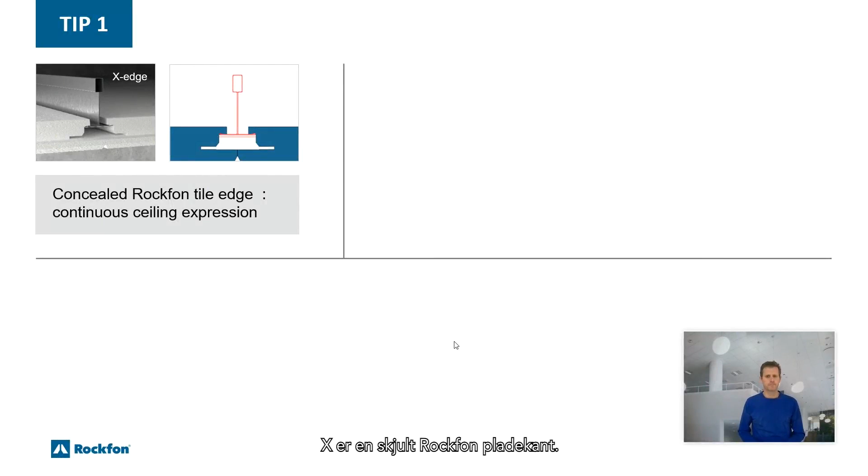Tip number 1. Let's start with what X-edge is and what its benefits are. X-edge is a concealed Rockfon tile edge. With this edge, you can make a concealed grid ceiling with an elegant and continuous ceiling expression.

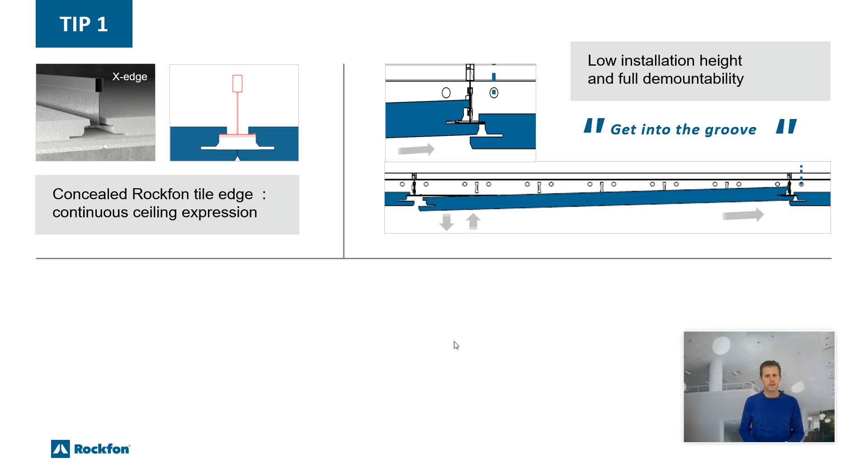To install or demount the tile, you just get into the groove on one side. On the other side, you have space to take the tile in or out. In this way, you install only from below the grid, and you benefit from a low installation height and full demountability.

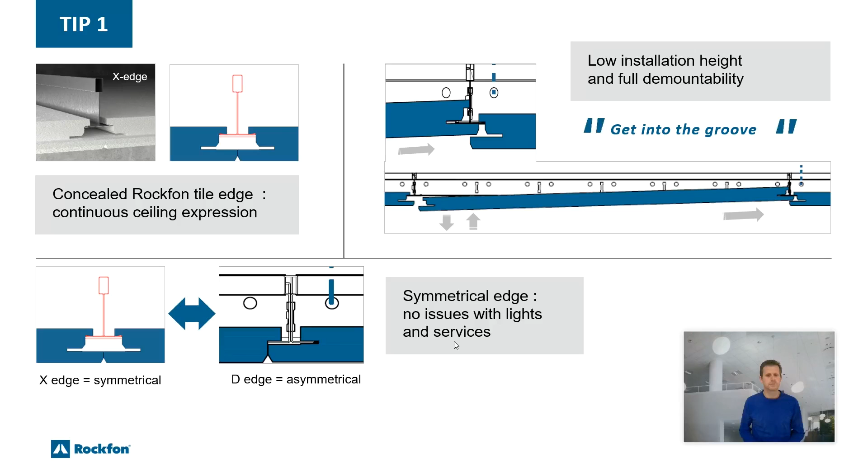Another important benefit is that X-edge is symmetrical, unlike the asymmetric concealed shiplap edges, for example D-edge. This means that the integration of modular lights and services is much easier.

Tip number 2. Choose your installation system, single or double layer. Consider the following points to help you decide if you need to use a single or double layer system. 2 systems are possible: the T24X single layer system and the T24X DLC double layer system.

The single layer system has a standard modular grid layout in one layer. It's easy and fast to install for small to medium tile dimensions, and a very low installation height of only 67 mm is possible. Also, the integration of services is easy.

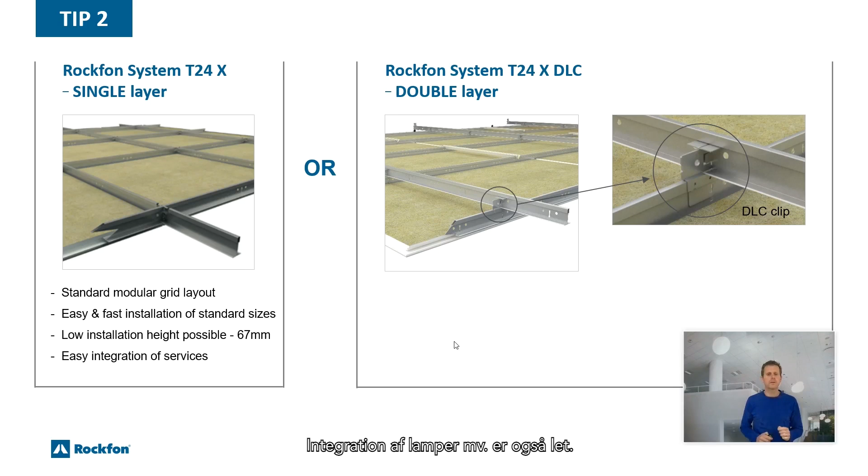In the double layer system, there are 2 layers of parallel T-profiles that are connected with the DLC clip. Because you can slide the tiles, installation is very easy for large tiles and the perimeter tiles. Brick patterns are possible. And depending on the allowed ceiling deflection, you can save up to 33% suspension points.

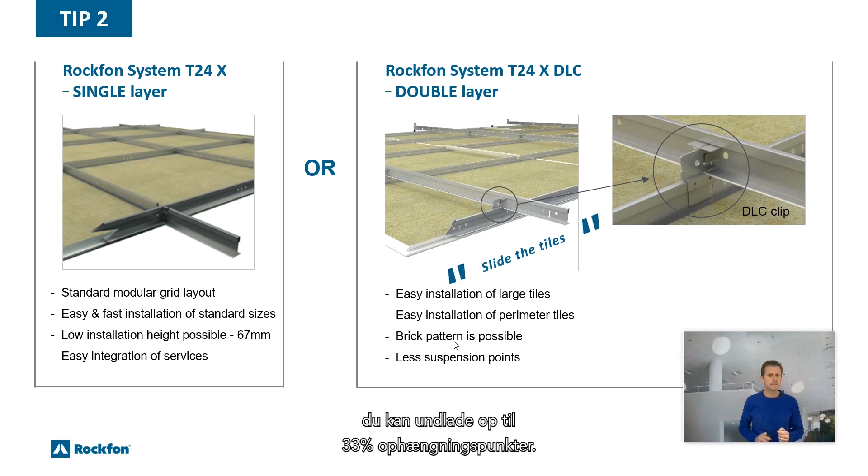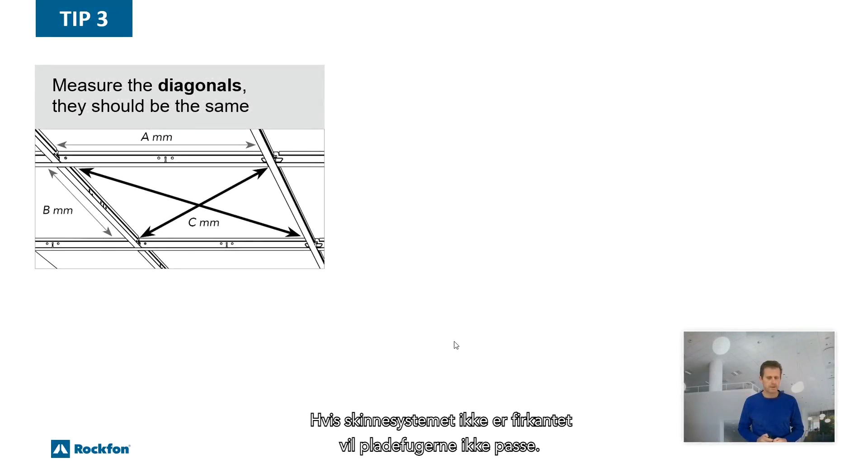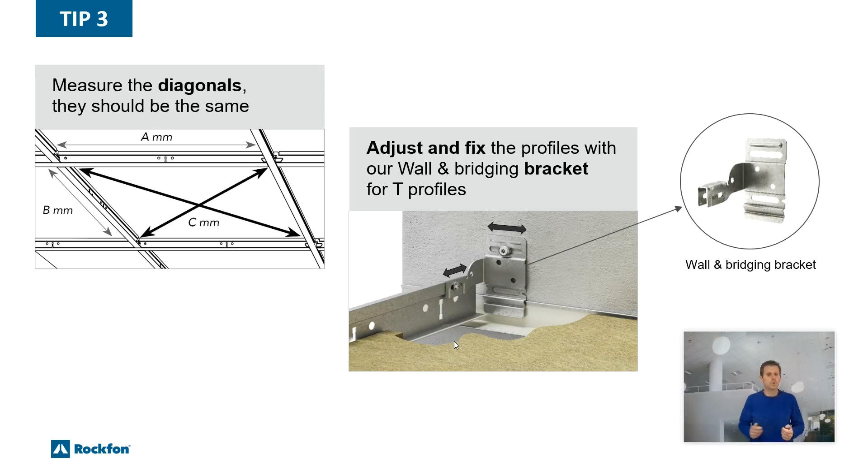Tip 3. Simple but very important. You're not there if it ain't fixed and square. If the grid is not square, the ceiling joints will not be aligned. The grid is square if the diagonals are the same. To make sure that the grid stays square, fix it to the wall. You can do this quickly and easily with a Rockfon wall and bridging bracket.

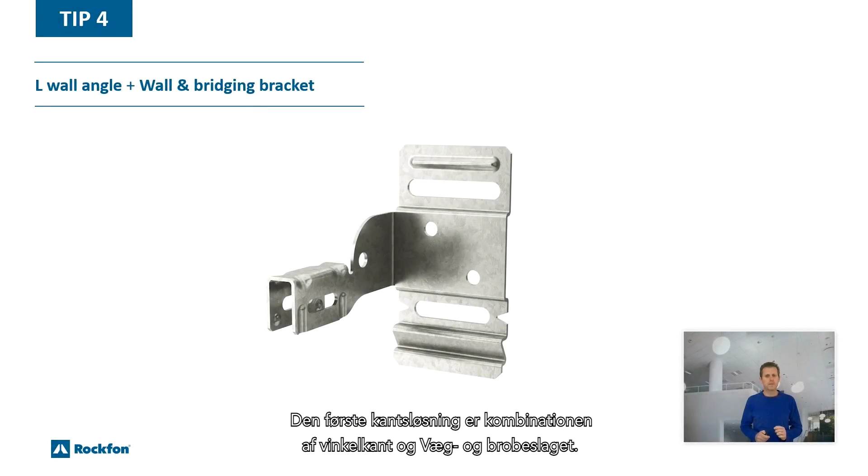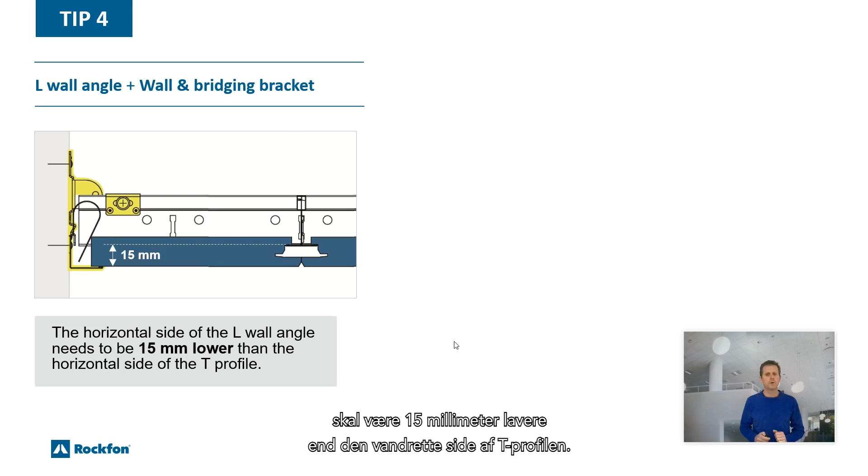Tip number 4. Check our perimeter finishing and surface integration solutions. The first perimeter solution is the combination of the L wall angle and the wall and bridging bracket. If you choose this solution, you have to know that the horizontal side of the L wall angle needs to be 15 mm lower than the horizontal side of the T profile. So the cross T's need to be lifted with a bracket or a filler block. Our wall bracket can be easily positioned at the right height.

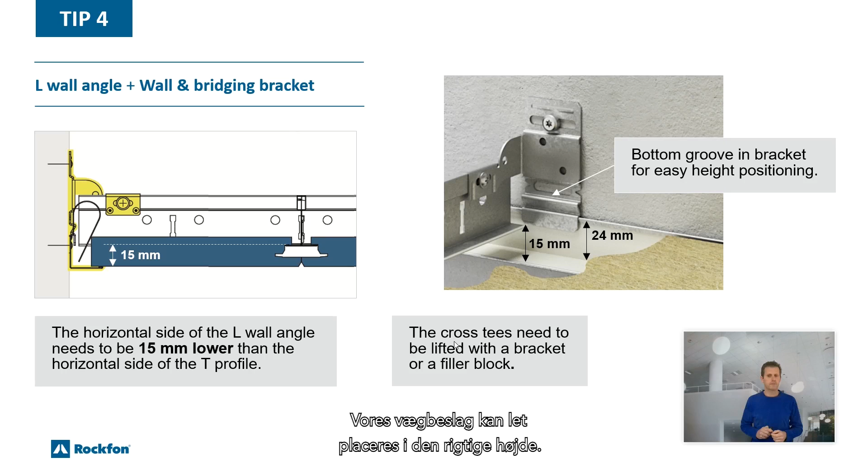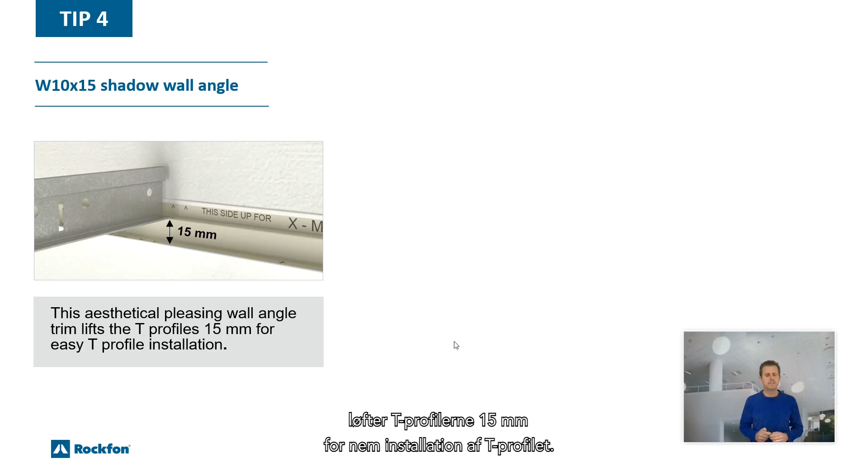The second perimeter finishing solution is the W10x15 shadow wall angle. This aesthetically pleasing wall angle trim lifts the T-profiles 15 mm for easy T-profile installation. For perfect mitered edges, the use of a saw is needed. Alternatively, you can cut the ends and use some flat corner caps.

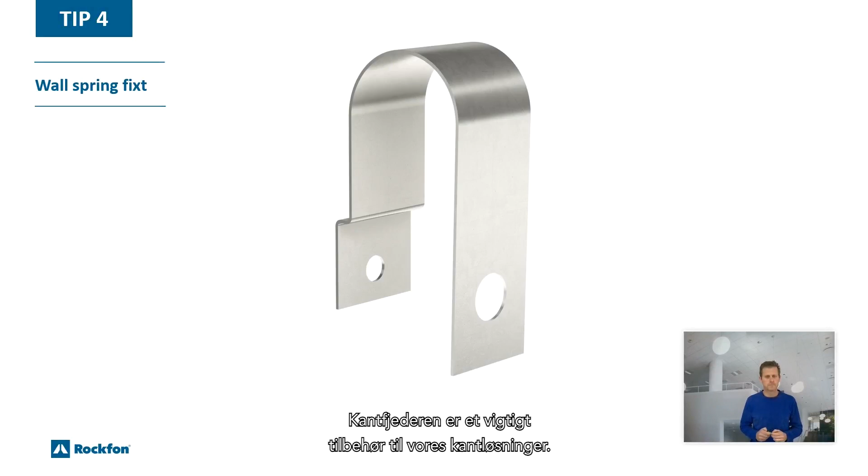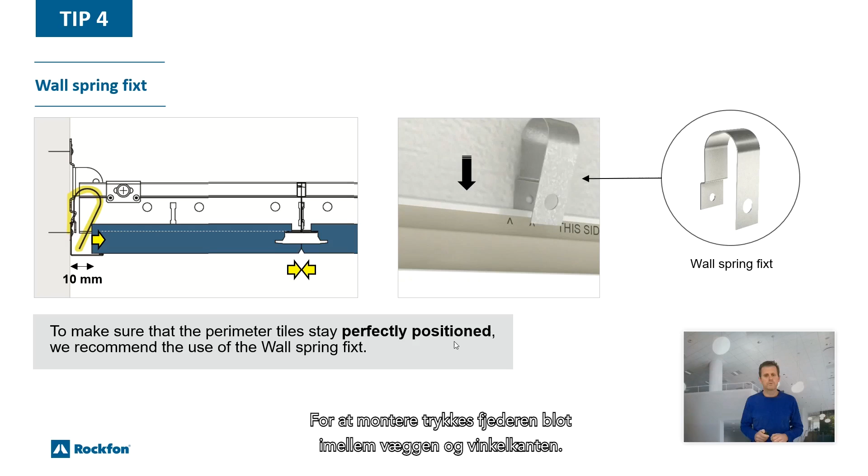The wall spring fixt is an important accessory of our perimeter finishing solutions. To make sure that the perimeter tiles stay perfectly positioned, we recommend the use of the wall spring fixt. To mount the spring, just push it between the wall and the wall angle.

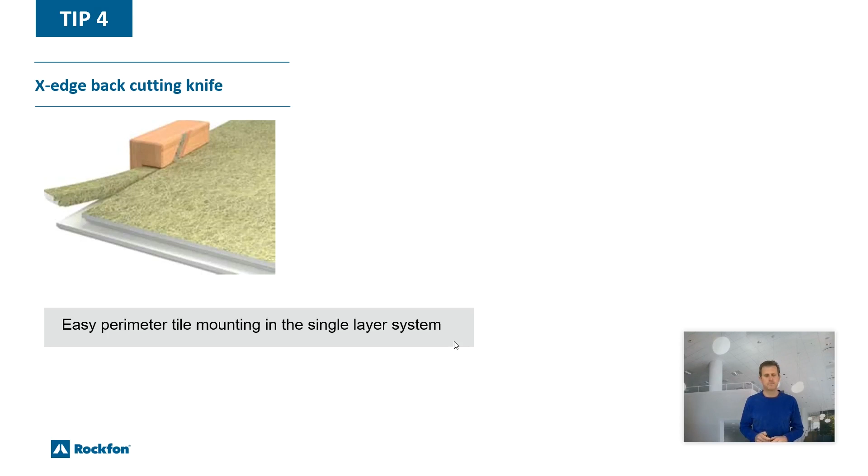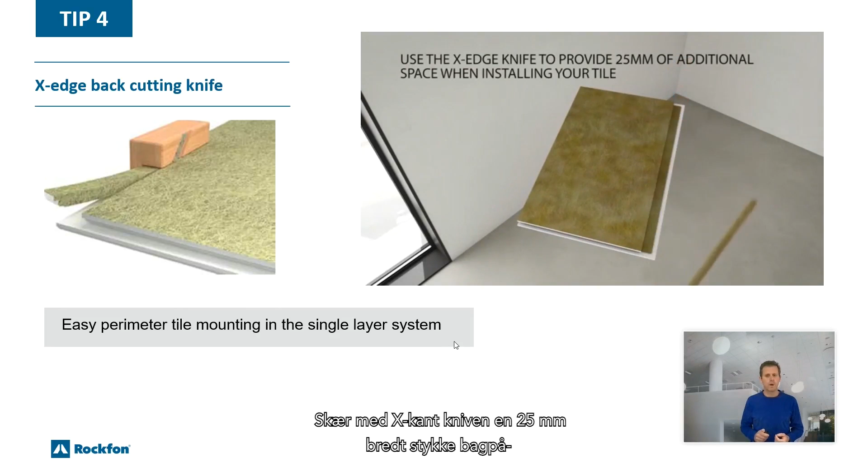The X-edge back cutting knife is also an interesting tool. It provides easy perimeter tile mounting in the single layer system. How to use it? Cut the perimeter tile to size and turn it around. Cut with the X-edge knife a 25mm wide piece from the back. Slide the tile over the cross-tee, install and slide it onto your wall angle.

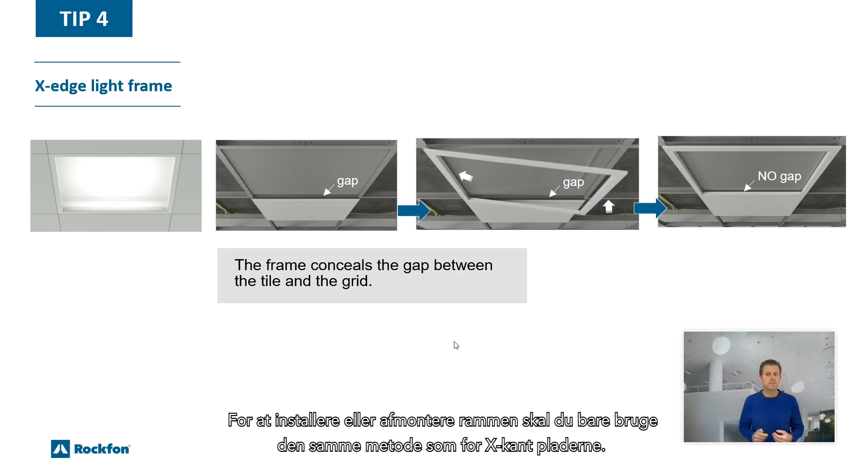Nice and easy. The Rockfon X-edge light frame. This is an aesthetically pleasing solution for basic flat surfaces such as modular lights. The frame conceals the gap between the tile and the grid. To install or demount the frame, just use the same methodology as for the X-edge tile. Get into the groove.

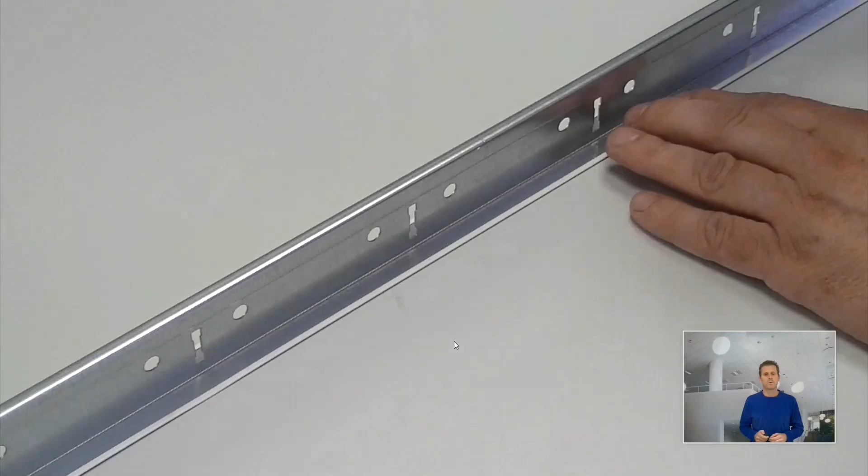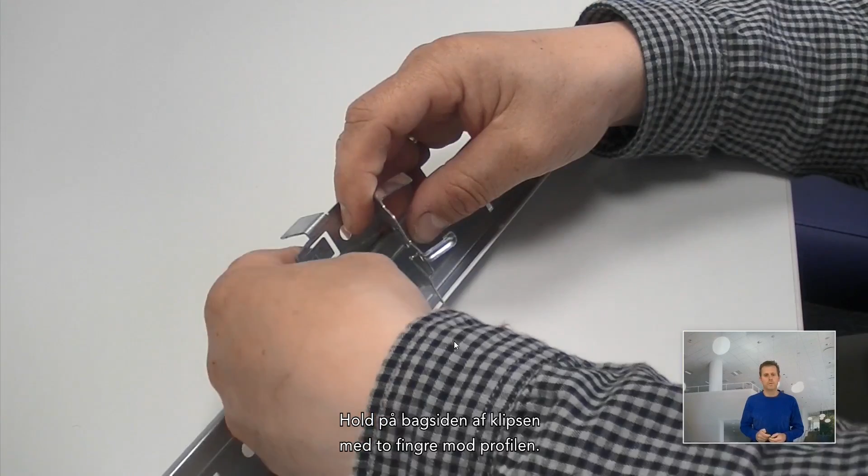The last tip, tip number 5. How to mount the double layer clip. Put the double layer clip on the bottom profile and slide it to a slot. Make sure you place the small hook part into the slot. Hold the back of the clip with 2 fingers against the profile.

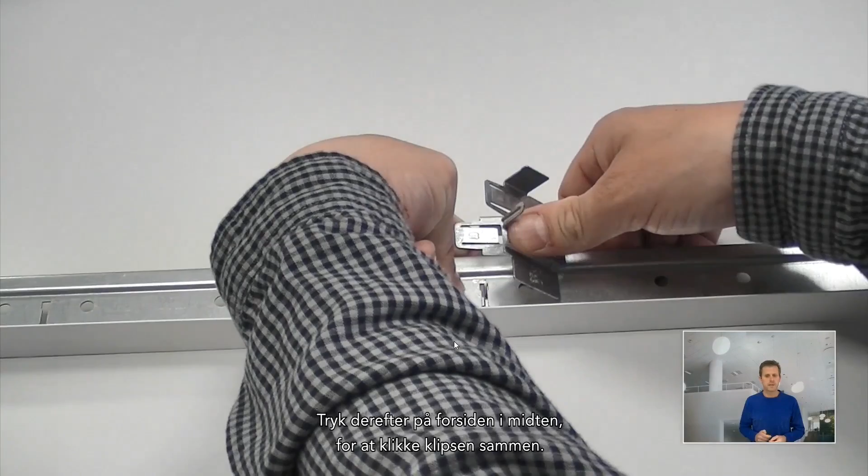Then push on the front side in the middle to click the clip together. You can see the connection at the small hook part. To connect the top profile, squeeze the upper part of the clip together and slide it into the slot with a click. Your connection is ready now.